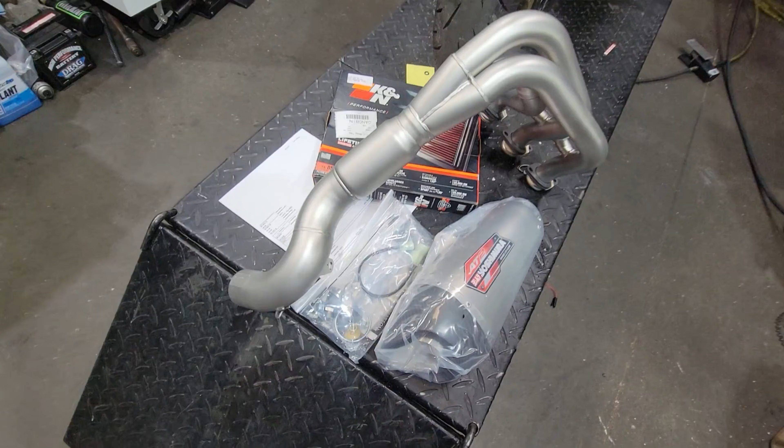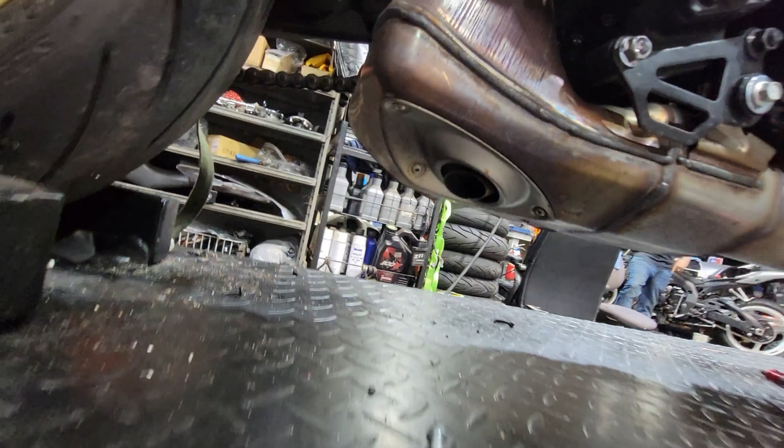Now, the exhaust on this bike from the factory is pretty, I guess you would say, weird. This is the exhaust system here. This is where it stops. Literally, the exhaust comes out right here. So if there's any dirt on the ground, guess what? It blows it on your shoes. Yeah, I don't know what they were thinking with the exhaust on this thing. I guess there's no way it can burn your leg or your foot, but man, it sure does look funny, and it sounds pretty

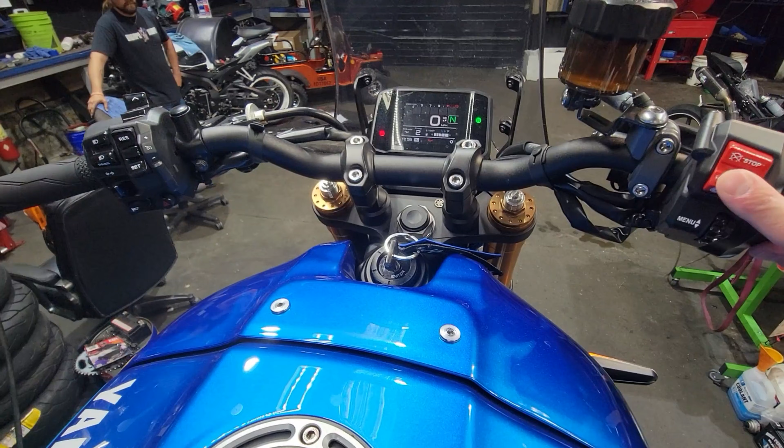pathetic. I don't know. Let's crank it up. Okay, that wasn't too cool.

So anyways, we're going to be putting this Yoshimura system on here. This is a 3-cylinder bike, so this thing is going to sound super unique. We'll have it fired up in just a second so you can see what it sounds like.

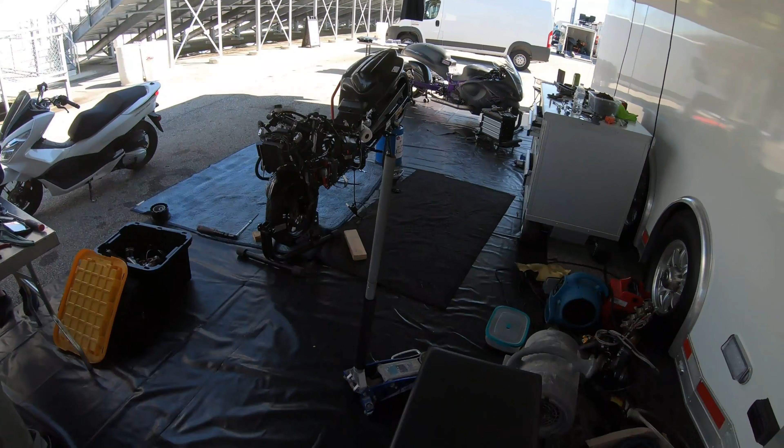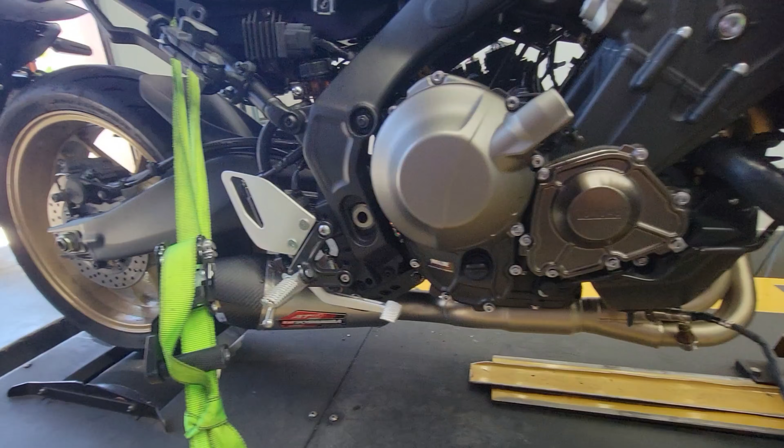Just like that, the exhaust system is installed on the XSR900, and this thing looks 1,000,000 times better. Now, not only does it look 1,000,000 times better, it also sounds 1,000,000 times better.

I have a good video at the very end when we get it off the dyno, and you can see it from, you know, back, a normal shot. But let's fire this thing up, see what it sounds like. Then we're gonna do a baseline pull, see what kind of horsepower we've got with the stock ECU and just the exhaust and air filter.

Now you can hear the thing. All right, let's see how it performs.

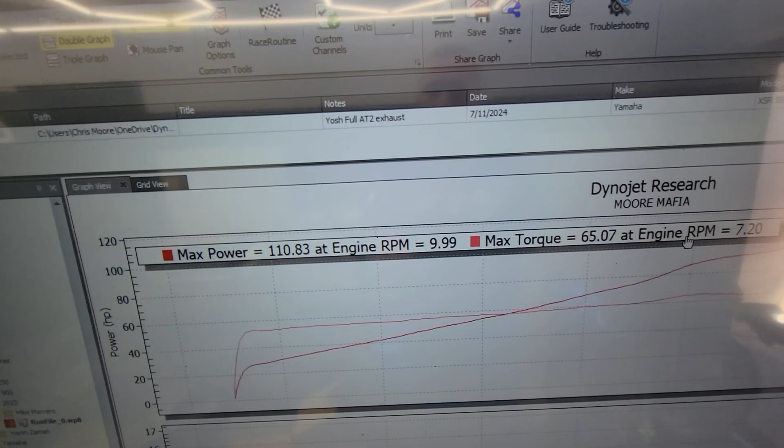The results, we come in as a baseline pull at 110 and 65 foot-pounds of torque. You can see the air-fuel ratio is not horrible on these things to start with, so we're gonna have to get rid of all these pesky restrictions to get some more power out of this thing.

Here we go, guys. We're almost finished up with the tune on this thing. We got some nice power gains, and we've got rid of the top speed limiter. We get a top speed of 158 miles per hour on the dyno, so theoretically this thing's got plenty of top speed. This customer also elected for the pops and bangs option, which is 100% totally optional. Check out the noise we can get out of these things.

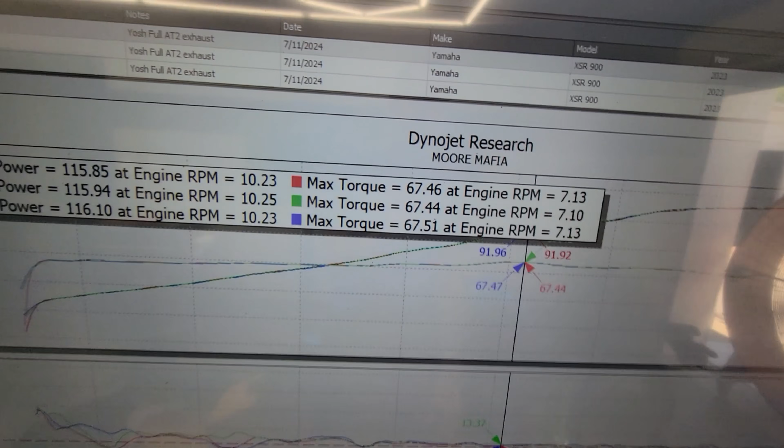Some nice power gains out of this thing. 116.10, 67 foot-pounds of torque. You can look and see how nice the air-fuel ratio is. I'll show you the baseline graph in just a second.

But let's talk about the pops and bangs. So the pops and bangs is 100% optional. It's a love it or hate it thing, guys. There is no right or wrong. Doesn't add or subtract any horsepower. If you want the extra noise, the burble on decel, it's pretty much on your command with this bike. So if you're slowing down above 5,000 RPMs, you can just barely touch back the throttle and you'll get the little popcorn, little snap, crackle, pop, little Rice Krispie treats. If you don't like it, we don't have to do that option. If you like it, but you don't want to hear it all the time, no problem.

Just let off the gas, smooth as can be.

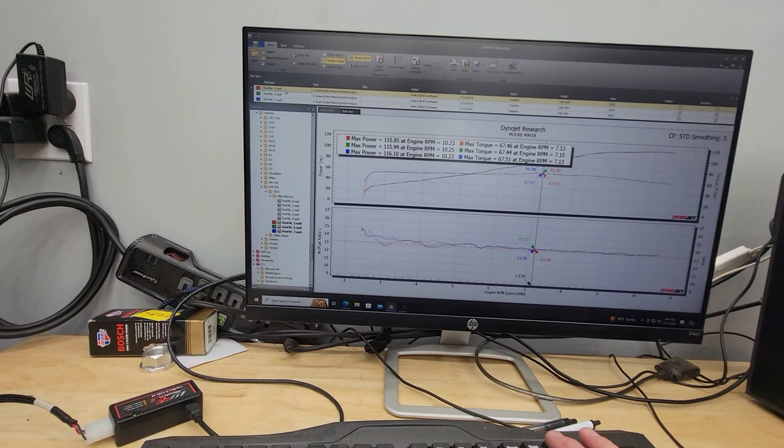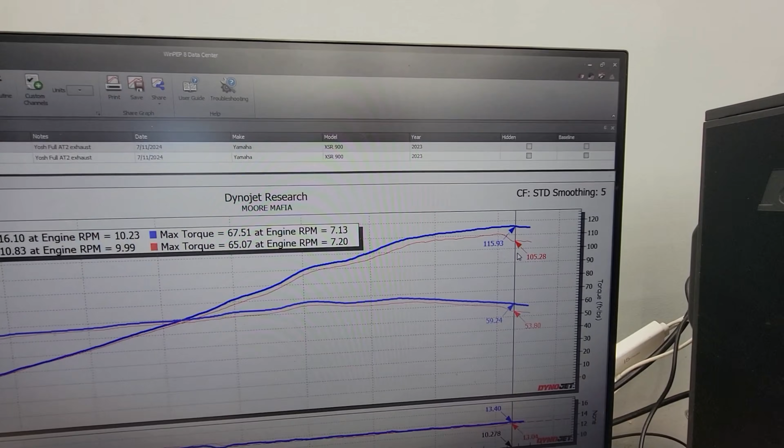All right, so let's look at our baseline pull versus our finished pull, and then we're gonna talk more about what kind of restrictions we removed from this thing. You can see in our horsepower graph where we picked up 10 horsepower at 10,200 RPMs. So this thing, huge gains, mainly on the top end.

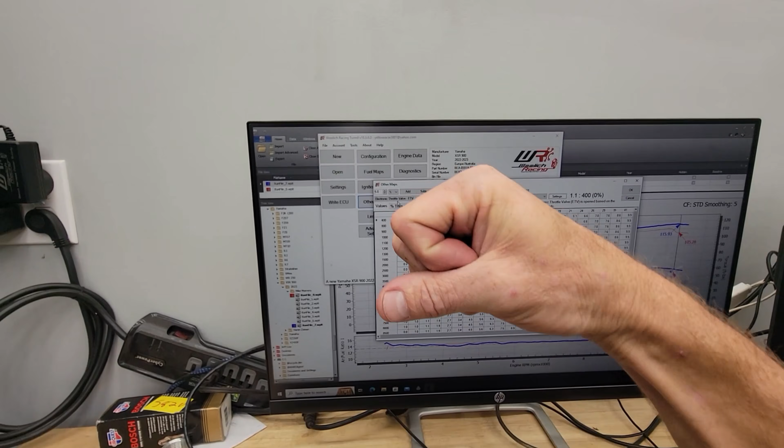And the reason for that is because of the electronic throttle valve in this thing. The throttle in this bike is all electronic. So even though your hand is twisting here, it's telling the computer what to do, and then the computer pretty much does whatever it wants.

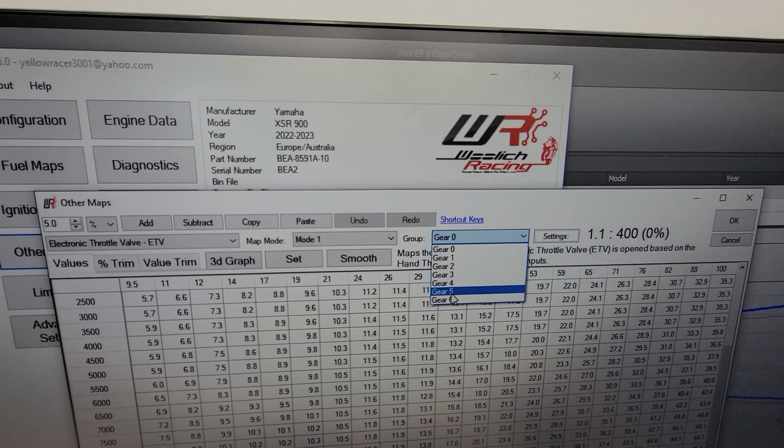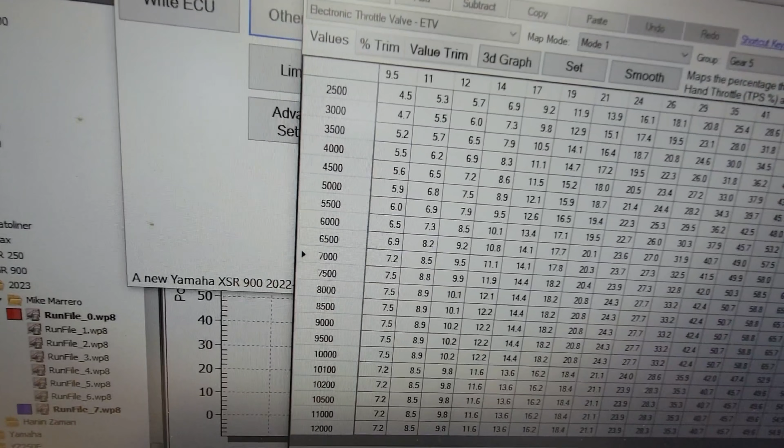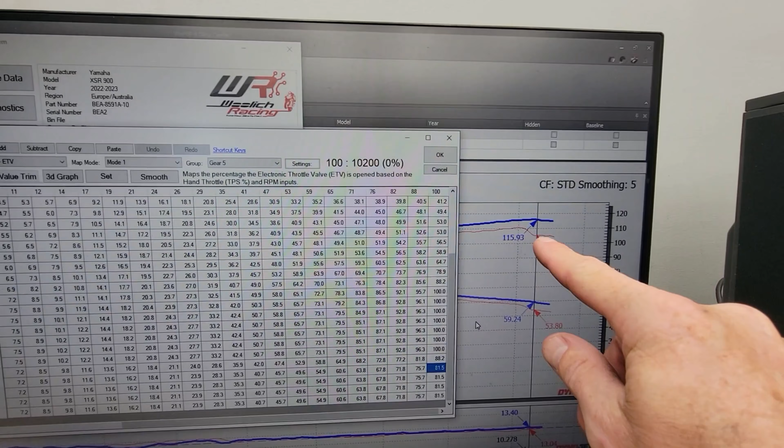So we dynoed the bike in 5th gear, let's put this in gear 5. You can see here, this is 100% throttle, so this is how much your hand is giving it. This over here is your RPMs. As you can see, it goes up to 100% at 7,000 RPMs, and then it goes back to 81% at 10,200 RPMs. So even though you're wide open, as soon as those throttle plates shut back off, that's why the thing quits pulling there.

So you got a lot of horsepower that we can gain and a lot of top speed that we can get where this thing normally shuts us off. We keep it going, and this thing is gonna pull much harder in all reality.

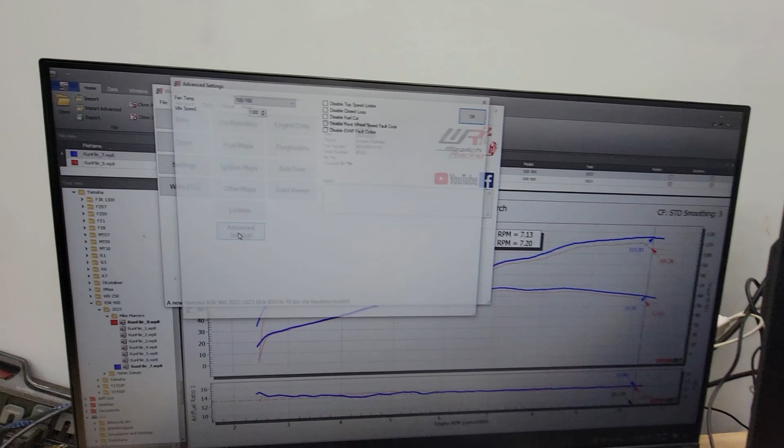Now, keep in mind, we can also do other things like lower the fan temps. We also disable the decel fuel cut. So when you let off the throttle from the factory, normally the fuel injector is cut completely off and the throttle does like that, a lot of engine braking. Well, when you're riding in the corners or in the twisties, you feel the bike constantly back and forth as you're on the throttle, off the throttle, on the throttle, off the throttle.

My hand was backwards from what I was saying. Did you realize that? So anyways, we get rid of that. And what we do is we keep the fuel injectors running whenever you let off the throttle. We also disable the top speed limiter, so you don't gotta worry about that. Basically, you get all the traction control, wheelie control, all that stuff still works on the bike, but all the pesky restrictions, they're gone with just a simple ECU flash.